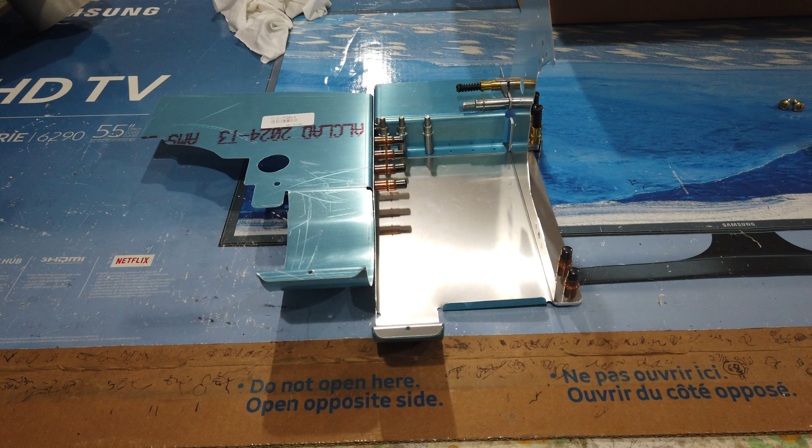Okay, so like I said, I'm going to be doing a little bit of engine baffle work here, mainly because I want to get the back of the baffles somewhat fitted because the oil cooler and the oil mount that I'm using, the cooler interfaces with the back side of the baffle, and I wanted to get the baffles, at least the back half of the baffles, fitted so that I can install my oil cooler and get the oil lines connected. So I've been working with that, and I've got a few things to point out to you guys.

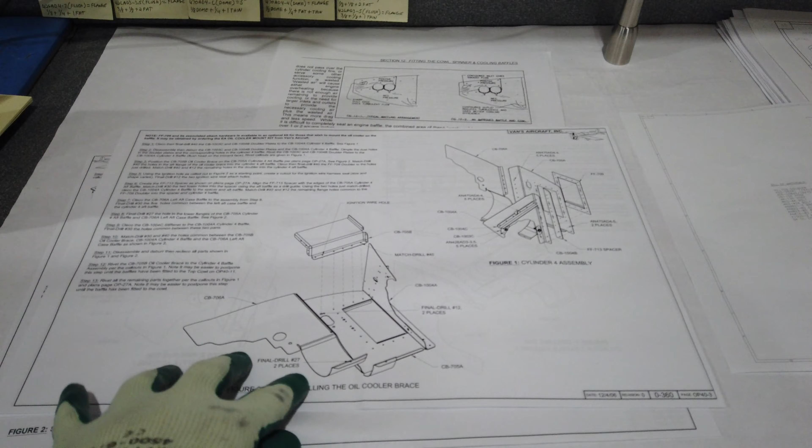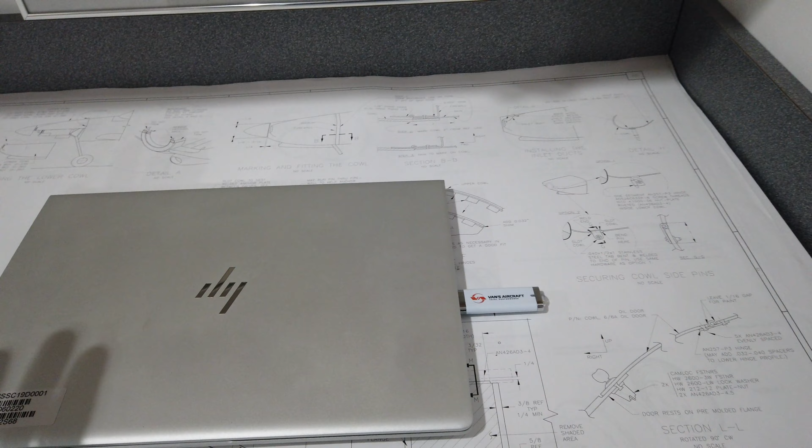The first thing that I had noticed was I got written instructions included with my baffle kit. Now, I ordered my baffle kit not that long ago, maybe about a year ago. And I also, of course, had purchased the thumb drive for my airplane for the RV7. Each individual airplane comes with its own. You can order a thumb drive. The thumb drive, if you don't already know, has all of the prints, all of the written instructions, and all of the optional pieces, parts, drawings as well.

So the prints that came with the actual baffle kit, these are considered an optional print. So you don't get this with any of the regular aircraft kits. You can see down here it says OP. That's an optional print or an optional part drawing, I believe. So I bought the baffle kit like a year ago. I got these written instructions included with it. Prior to buying this, I had purchased the thumb drive, and the thumb drive I bought probably about 3 years ago. So the thumb drive is actually older.

But I noticed that the prints that I got with the baffle kit are actually older than the prints that are shown on the thumb drive. The thumb drive prints are newer by date, and they are revision 2 for the baffles. So these written drawings that came actually with the kit are from 2006 with no revisions. The instructions from the thumb drive for the baffle kit are newer. I don't recall the date, but they're up to revision 2. So I'm using the instructions and the drawings from the thumb drive. I kind of cross-reference that a little bit with these paper drawings.

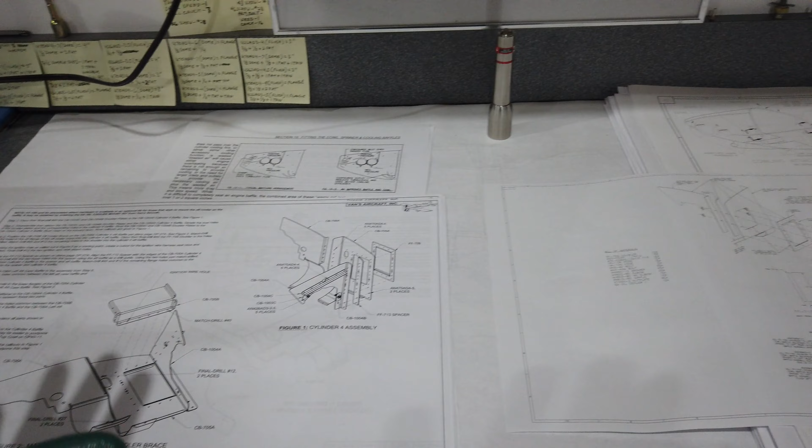I don't know what the revisions are. If I recall correctly, the updated print on the thumb drive does not list the individual revisions, so I don't know what they are. But it's just something to be aware of. So I'll leave it at that. It's just something to consider. And I usually do that with all of my prints. Anytime I break out a paper drawing, I look at the date and I look at the revision, and then I'll compare that drawing to the drawings on the thumb drive.

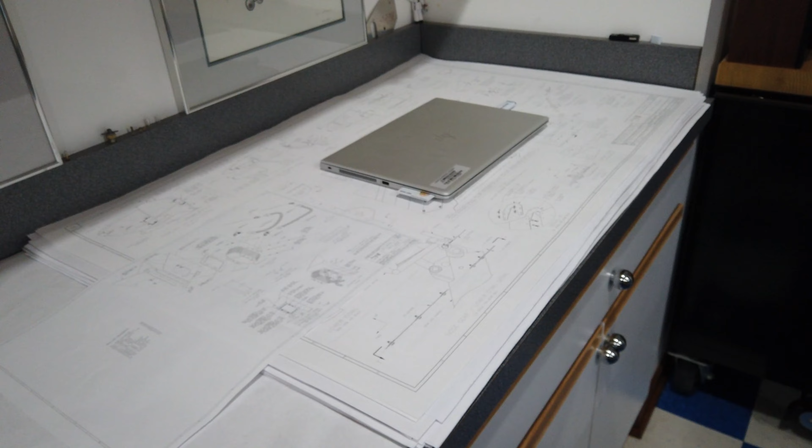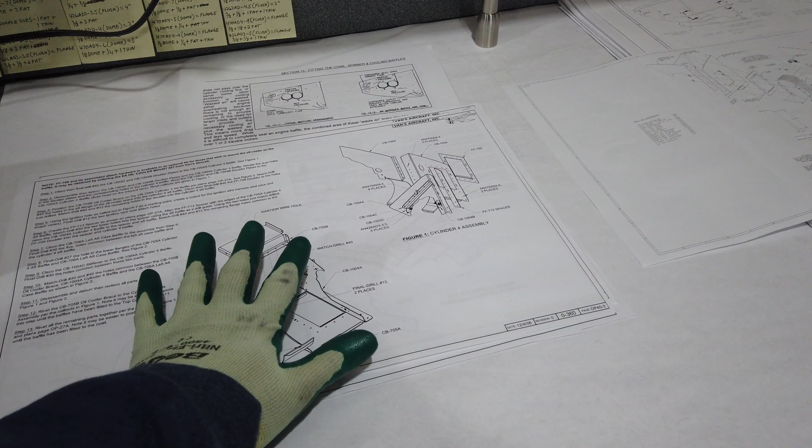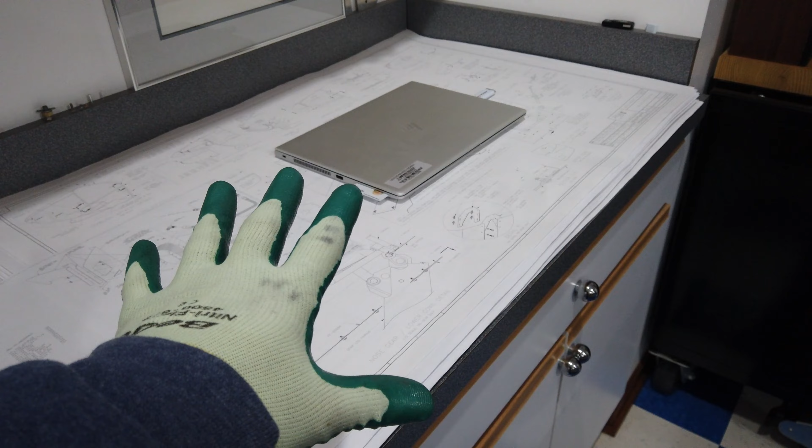Now, I don't want to get too far off on a tangent here, but just because a print is newer does not necessarily mean that that's the print you should use. And I'm just going to use this as an example. If, let's say, I bought this baffle kit and it came with these written instructions, it may be wise to use the instructions that actually came with the kit that you purchased. Sometimes, and I can't recall any specifics, but I have come across where I had purchased something that came with drawings, and later on the part itself was changed and the drawings were also changed for that part. But if you try to use the new drawings with the old design of that part, they don't play nice. So keep that in mind as well.

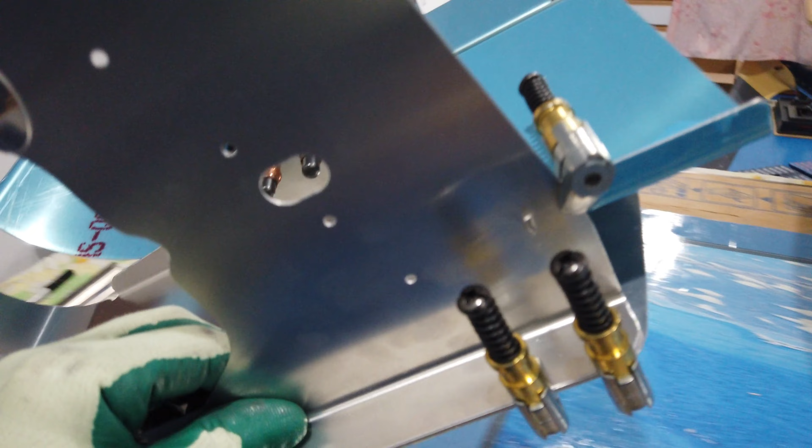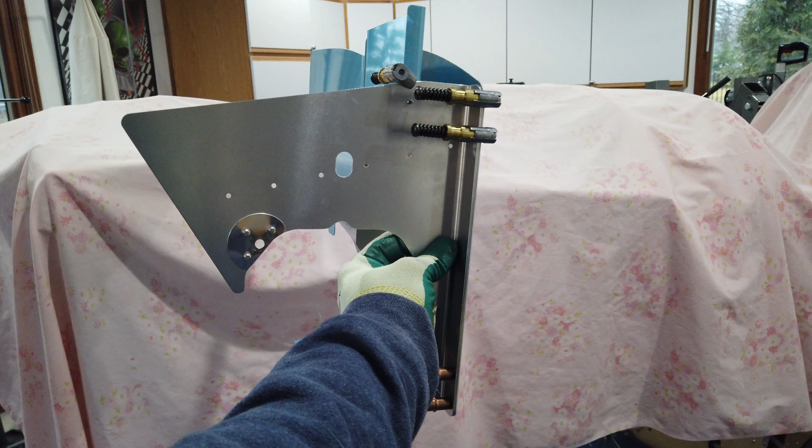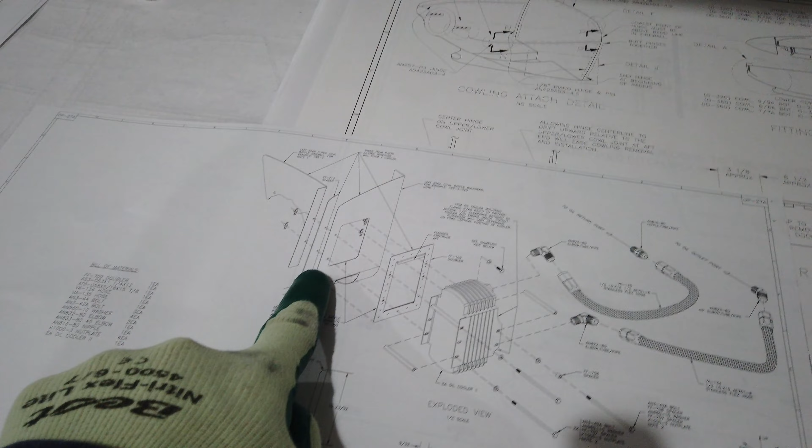Enough about prints. So here we are with the baffles. So this is the back baffle. This is for the number 4 cylinder. So if I can take this over to the airplane, I've got the airplane covered, but of course my engine is under there. So this would be basically the back left corner baffle, like this. So when you go through it, you'll notice right away that there's a provision here in this corner for an oil cooler. And I can show you that here. So this is the back corner. This, of course, is the cutout for the oil cooler.

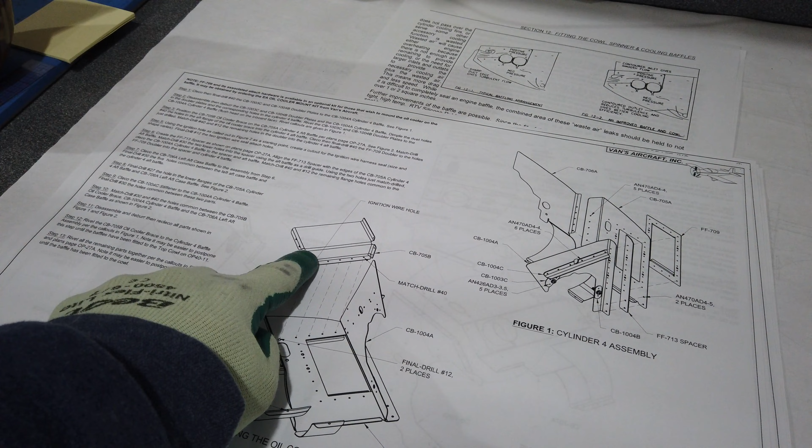Now, I'm not using this, but the way that the prints are drawn and the way that they talk about it in the written instructions, this is that same back corner. You can see the cutout. You've got this reinforcement piece here, and you've got some other reinforcement pieces here. There's a note up here that basically says that if you want this oil cooler reinforcement plate and its associated pieces parts, that's a separate kit that you need to purchase. Since I am not using the oil cooler in this location, I did not buy that kit.

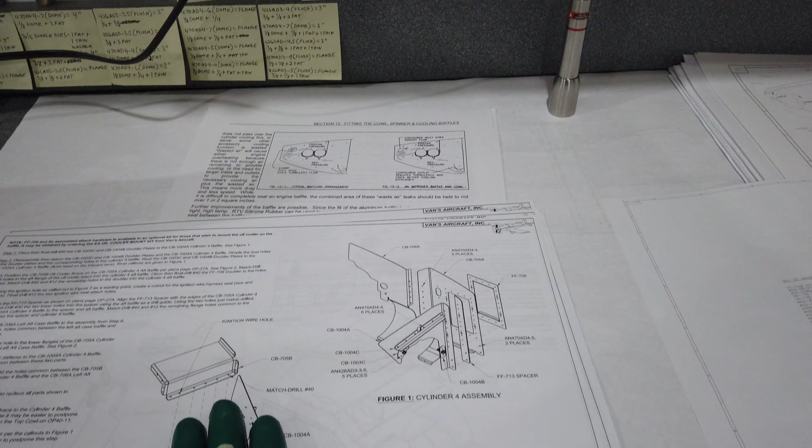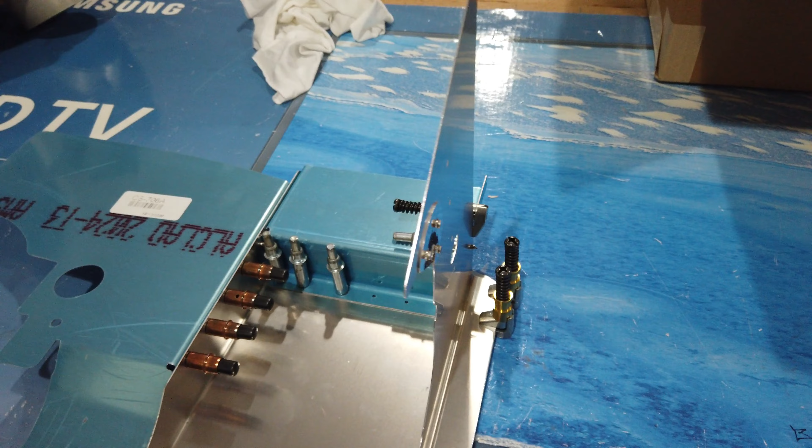The thing that I'm not entirely pleased with is that these instructions only discuss putting the oil cooler here. There aren't any written instructions guiding you through the process if you are not going to use the oil cooler in this location. So since there are no specific instructions to assemble the baffle with no oil cooler attached to it, you kind of have to make it up as you go. Just a little bit. It's not the end of the world. At this point, you should be kind of accustomed to doing that kind of work anyway, in my opinion. So all I had done was this. I took the individual pieces parts that came with the baffle kit, and I put them together without any modification and without any provisions for the oil cooler.

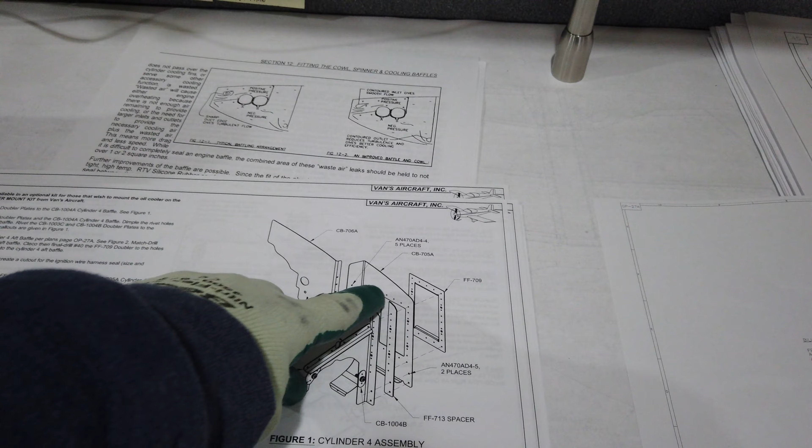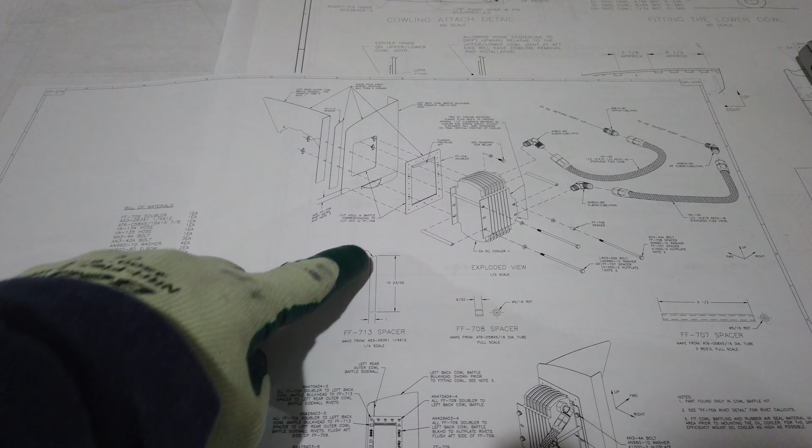It's pretty straightforward. When you look, what came with the actual baffle kit is this piece here. This is a spacer. They tell you in the written instructions to reference this drawing, and this drawing came with the written instructions. And you can see when you look at this, they tell you to use a certain type of aluminum material, and then you're supposed to make that spacer from scratch. My material came already cut to size except for the length. I just had to cut it shorter, and then I had to round off the corners.

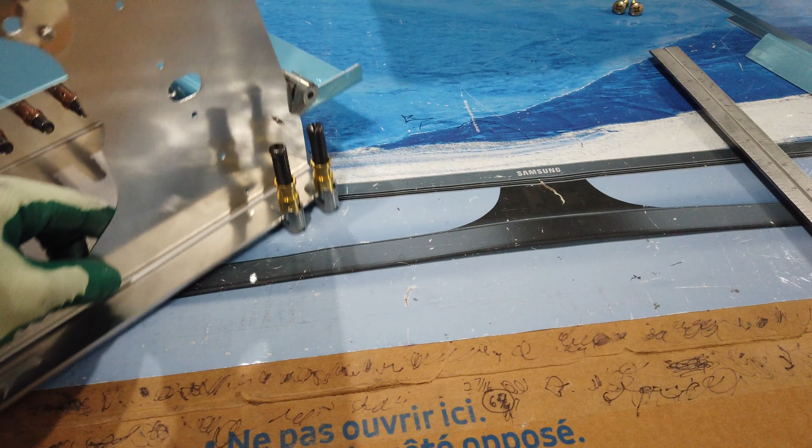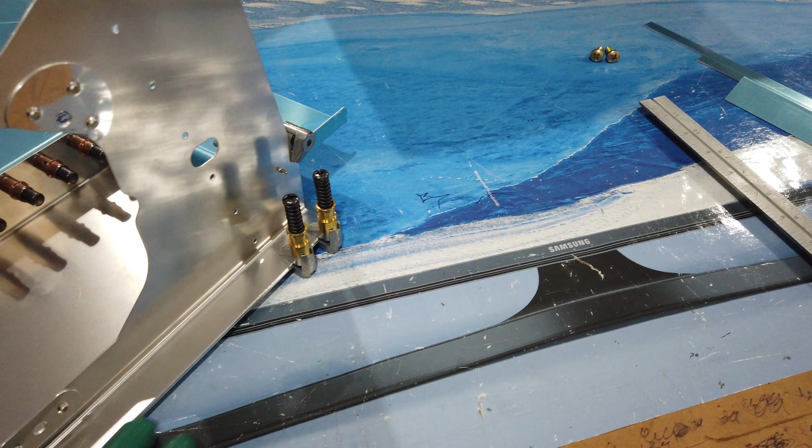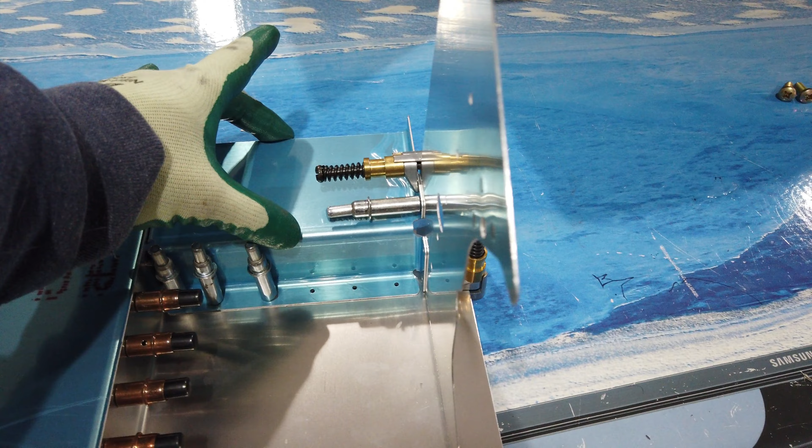That piece is actually sandwiched in here. It's just a thin metal strip, and it's between this piece and this piece. It's up underneath here. So all I had done was just lay it up even with this edge. I marked these two holes, and then I rounded off this corner here. And then I had just fitted this piece to the top and this piece to the side here.

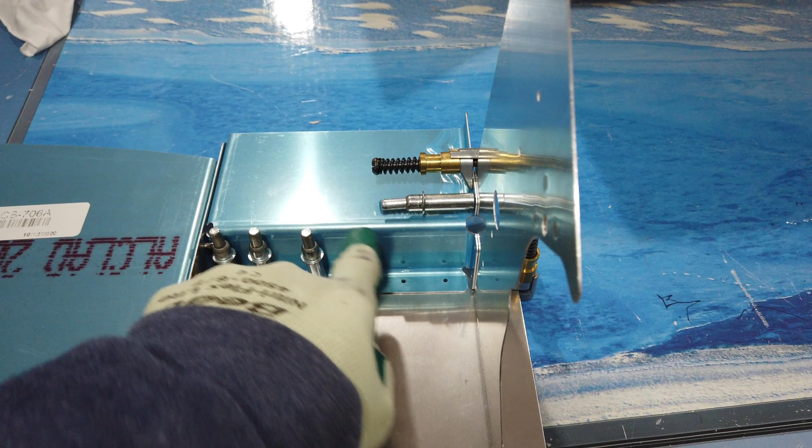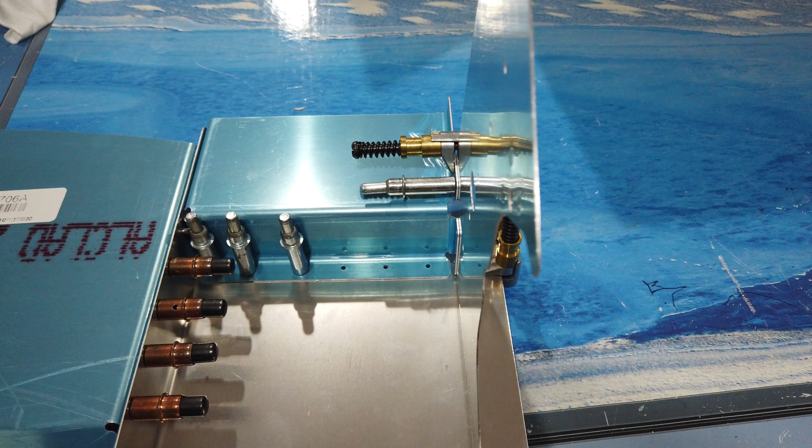Now when you go to mount this piece, there are no pre-punched holes. There are pre-punched holes in this part. These flanges are all pre-punched, but the parts that this mounts to don't have any pre-punched holes. So when you look at it, you have holes here for a reinforcement piece of angle that goes here, and there is a pre-punched hole back here. You might be able to see the cleco coming in this way.

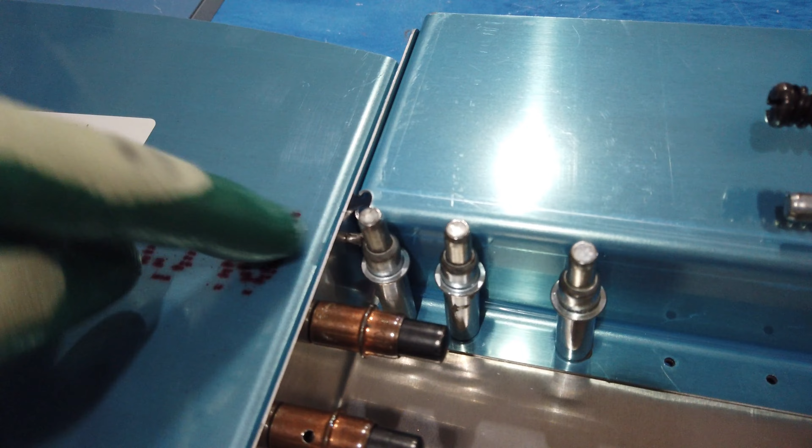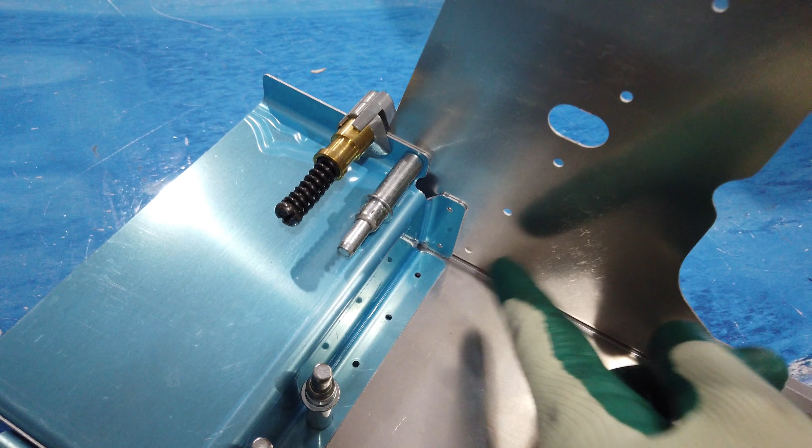You do not want to cover up those holes with this piece. If I brought this piece any lower, it would have covered up that hole back in here with that cleco that comes through. And if I came down any lower, it would also cover up this hole here. So I just positioned this to clear rivets that are going to go through these couple of holes that I just pointed out.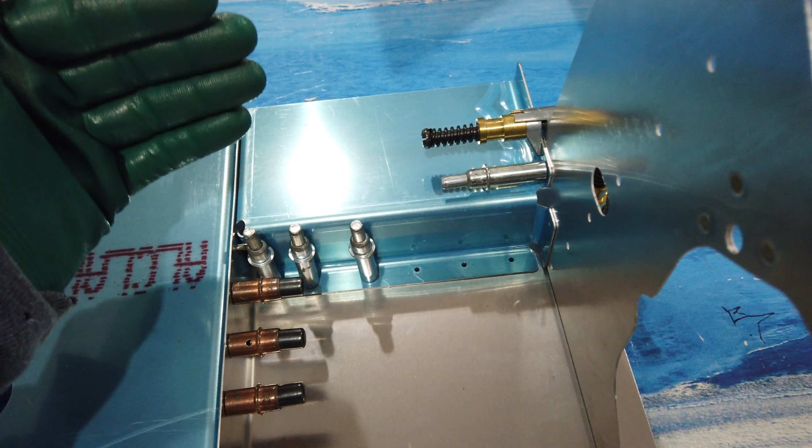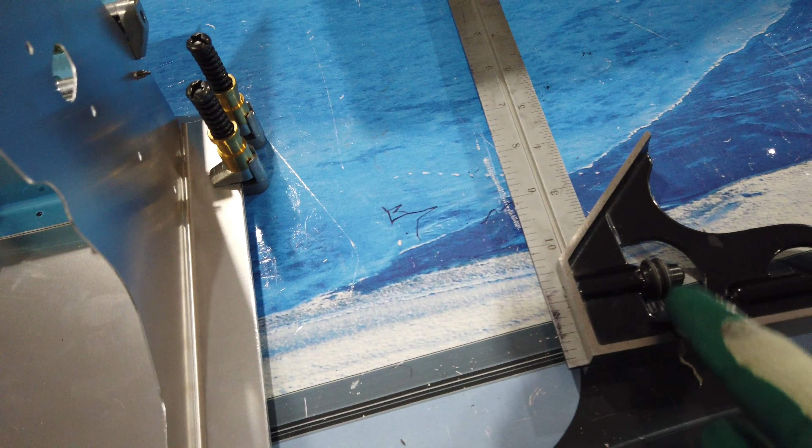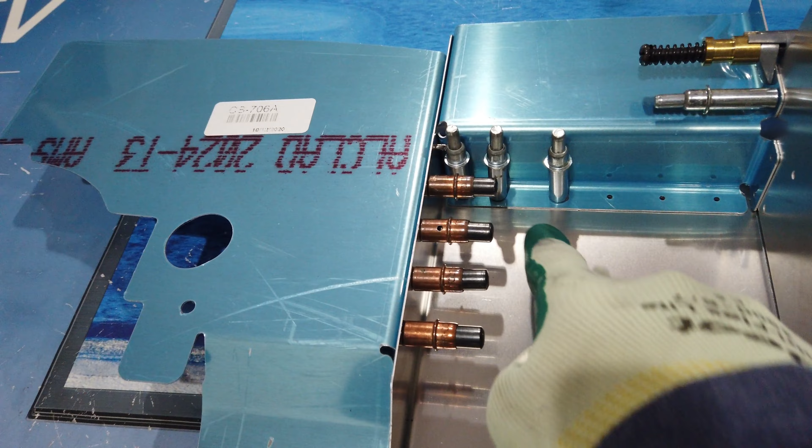So I laid that where I was comfortable with it, not blocking any holes, and I used a, I'm drawing a blank, a square. I put the square up against this edge here, I believe, and along the bottom part of the flange here, just to make sure that this piece was square to this piece along this flange. Put it in there square, marked the holes, drilled the holes on this flange, and then when it came time to do

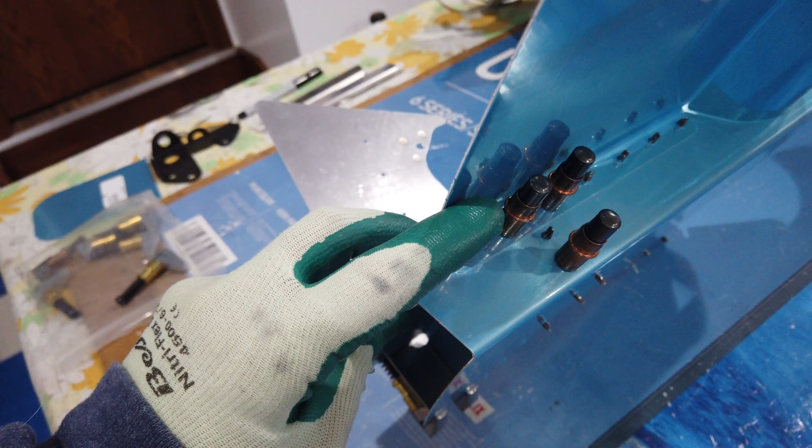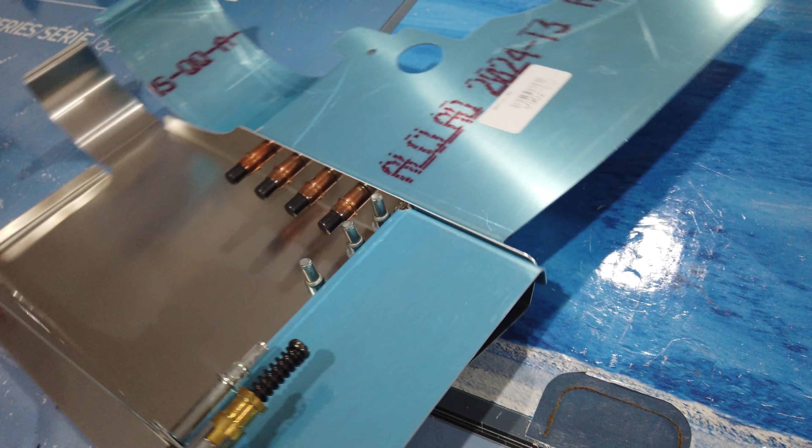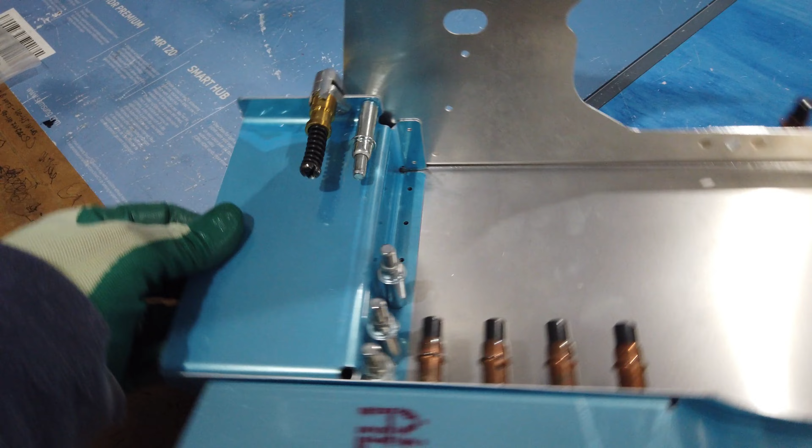the holes here where these clecos are, you want to make sure that this top edge here is parallel to this top edge here, because this could potentially sag or it could potentially stick up. So just make sure that you get this face parallel with this edge here, and then you can reach underneath and mark these holes and drill them. Once you get those clecoed in place, then you can do the same thing on this other side. You can mark these holes and drill them, these down here. And there's one here where this cleco is.

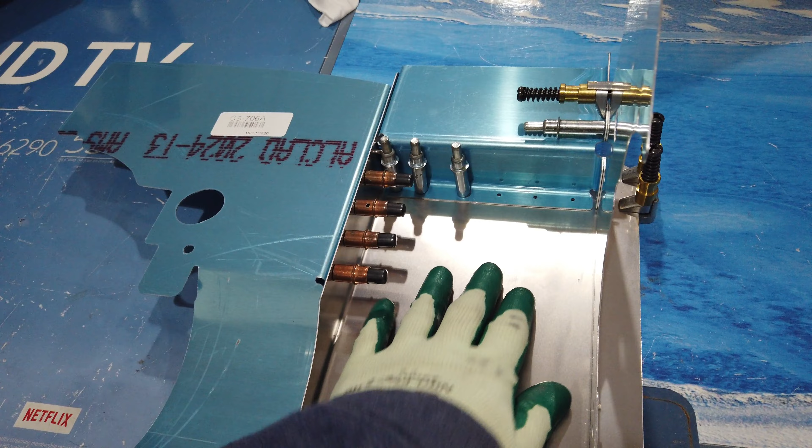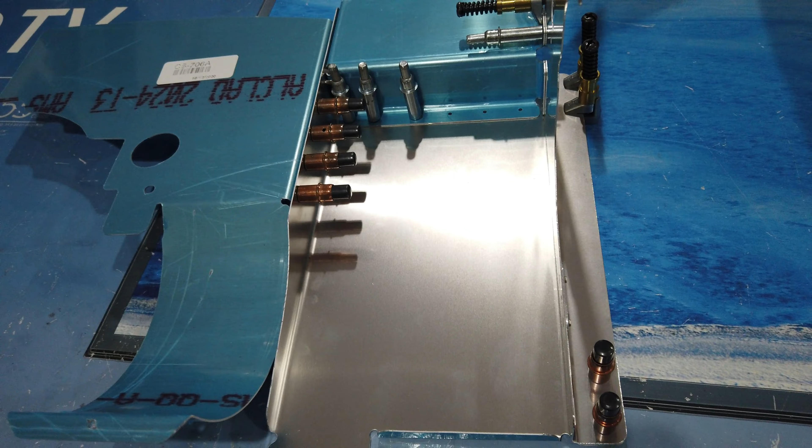It's a lot of information to digest, but these are all individual parts. This is by itself, this bottom one's by itself, this one is by itself, this piece here is by itself, and then this spacer that you make. When you go through the written instructions, look at the prints and kind of walk through it, it will make a little bit more sense to you. But my point is that since there aren't any written instructions on how to do it unless you're using the oil cooler, since I am not, I had to kind of make this up a little bit as I went.

The things that I found to be aware of is you want this piece to be square to this piece. That's why I used my square in here to get this laid out correctly in relation to this piece. And then you want these surfaces to be nice and parallel. You don't want this to be twisted. That's basically what I'm trying to make a point of. So I have a few more holes to match drill, and then I don't know if I'll start riveting this together or not. I'm not quite there yet, so let me do those.

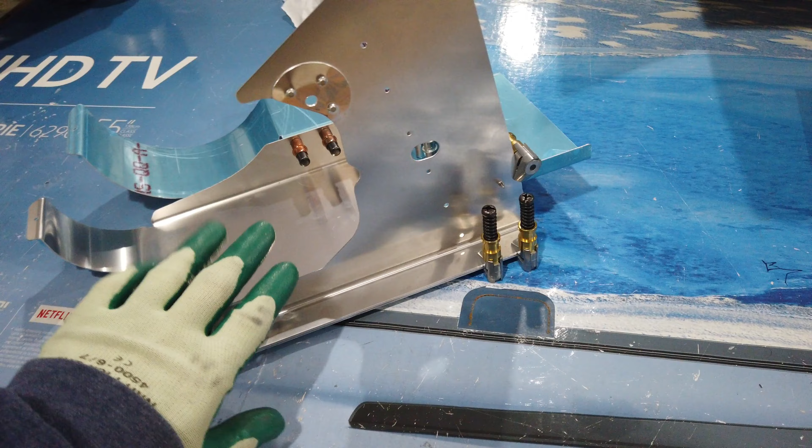Oh, another thing was this side piece here. This gets bolted to the engine, and you can see there's a cutout here. This fits around the valve cover. Fit this piece first to the engine and do all your trimming, because with this piece completely by itself, it's really easy to do. Once you get this riveted to other things, it would be very difficult to try to fit this around your valve cover. I've got aftermarket valve covers, so I had to trim this back quite a bit, but it was easy to do. Just take your time.

You still want to maintain a nice tight fit, because if you get too big of a gap, then you're going to have air bleed through here, and that defeats the purpose of having a baffle in the first place. So take this piece, trim it and fit it to the engine. Once you're done with that, make that spacer that goes in between here next, and then you can start fitting this piece in place. And again, make sure it's nice and square and true.